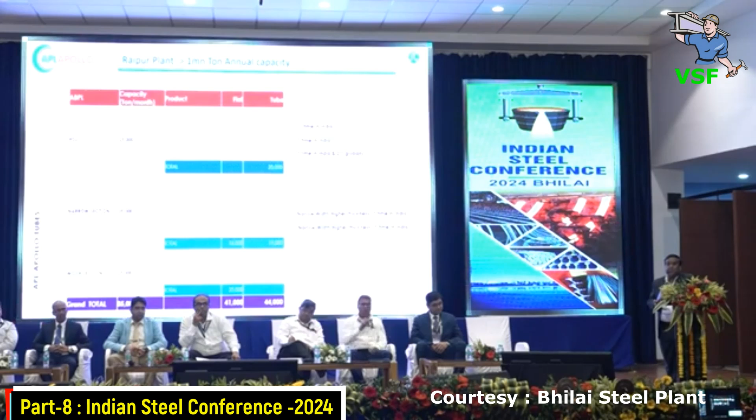So this has already been covered by our CEO yesterday. This is the gist of our APL Raipur plants. We have 4 plants, 600 acres of land, where we are producing both tubular as well as flat products. Out of those 4, we have 2 flat products complexes and 2 tubular, where we are producing from 8mm into 8mm to 500 into 500. Very soon we are going to produce 1000 into 1000 into 40mm.

That will be the first in India and second in the world. Approximately 85,000 tons per month is the capacity, overall 1 million tons annually. Very soon we are going to touch 1.5 million tons in a single unit.

In the tubular section we are producing precision commercial tubes from hot roll, cold roll, CRCA, GI, etc., and then black HR hollow sections and blanks. Almost 90% of our own plant structure is made by us.

So regarding the corrosion problem - every year almost 5% of the world's GDP is lost on account of corrosion, and in India approximately 4% of Indian GDP is lost on account of corrosion. That comes to around $100 billion, which is nearly 8.21 lakh crores per annum. So imagine what we are losing.

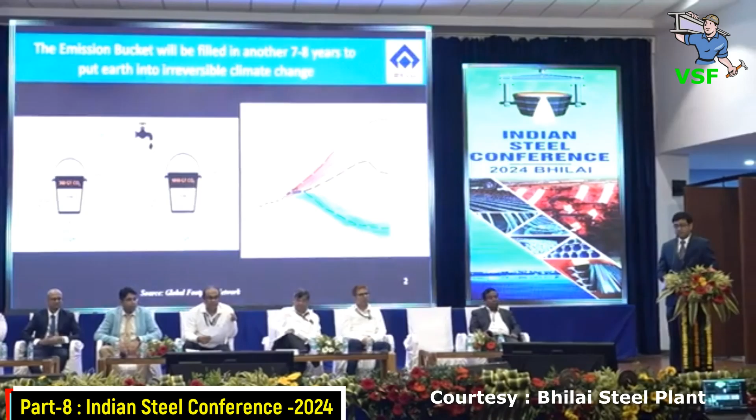It is so that the emission bucket will be filled in another 7 to 8 years, putting Earth into an irreversible climate change. I welcome all of you to my presentation on the paper Decarbonizing Steel, the Way Forward.

It would be a summary of all the previous presentations that my friends from Steel Authority of India Limited have been telling you since morning. So what is decarbonization? Decarbonization basically targets climate stability, targeting a healthy environment for all of us, economic stability, directed towards achieving sustenance.

Steel, as we know, is one of the most important materials of modern life. Making it is highly carbon intensive, and 1 ton of steel actually produces 1.8 tons of carbon dioxide emissions globally.

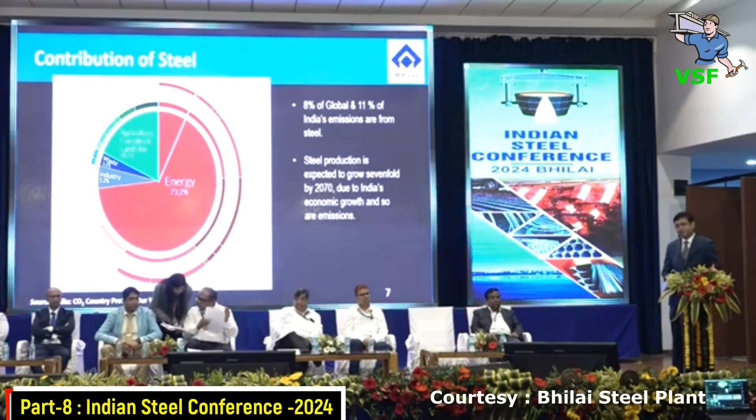So why decarbonize steel? Steel contributes around 8% of global and 11% of India's emissions, and steel production is set to rise 7-fold. With India's economic growth, emissions also tend to increase. Megatrends indicate that 14% of steel companies' potential value is at risk, along with growing investor and public interest towards sustainability and greener products.

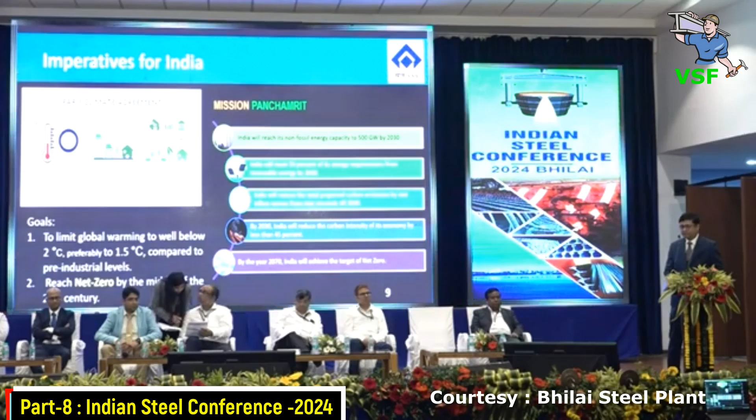Imperatives for India are basically drawn from Mission Panchamrit, Government of India, to reach net zero by the middle of the 21st century. Looking at the two popular routes of steel making in India, the average from BF, the most popular one, is 2.5, and from coal-based DRI and electric arc furnace is around 2.8. The thermodynamic limit of the BF process is around 1.8.

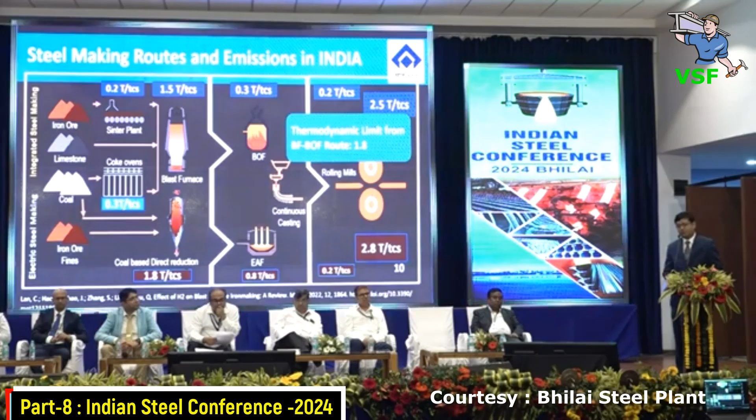But if you look at this DRI-based electric arc furnace with green electricity and green hydrogen, it can be brought down to as low as 0.1 ton of CO2 per ton of crude steel.

For the way forward, there are basically two ways to do it: controlling input like raw materials and electricity, and controlling output, that is by improving efficiencies, circularity, and carbon capture and utilization.

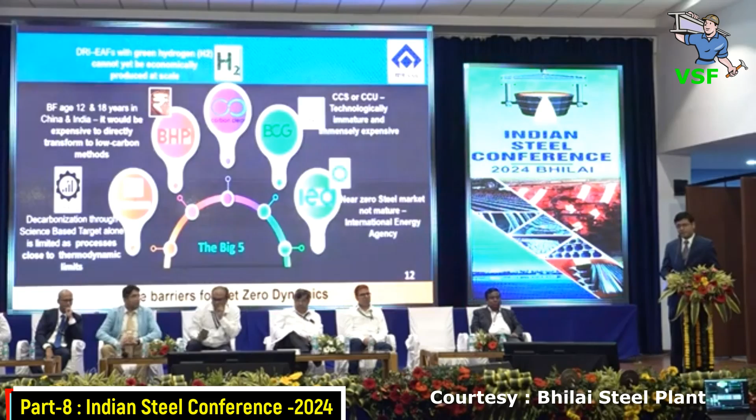There are many significant barriers in the net zero dynamics. First and foremost, decarbonization solely through science-based targets is not really possible. Many of the furnaces in India and China are quite new. DRI electric arc furnace with green hydrogen is yet to be economically produced.

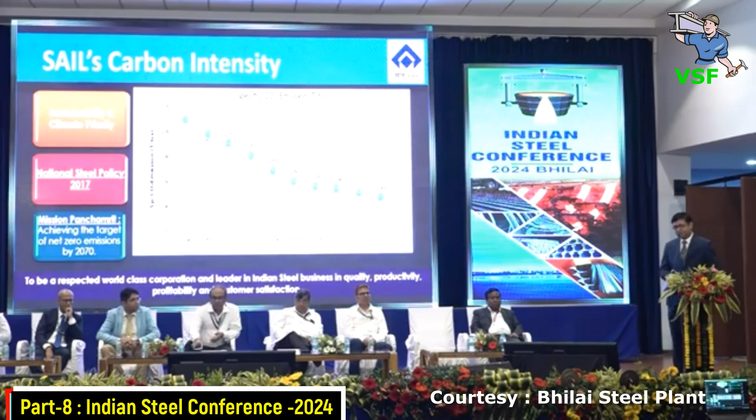If you look at the carbon intensity, we have been significantly coming down over the years, and we are hovering at around 2.5 right now. But how to decarbonize? Looking at what we did for Steel Authority of India Limited, the most significant opportunity in front of us is that markets for carbon neutral products are slowly coming up, along with significant government support in achieving our targets.

Decarbonizing is basically through three phases. First, we target to control the carbon-based reduction process through efficiency increase. Next would be to change over to carbon-free technologies, many say hydrogen, or there might be some other alternative we don't know in the future. Then there would be a tumultuous phase called the transition phase.

Mission for way forward in Steel Authority of India Limited can be divided into three phases. In phase 1, we target minimizing CO2 emissions by increasing process efficiency, MODEX, with best available technologies. In phase 2, we target optimizing carbon neutral technologies with the existing ones. In the last phase, we target attaining net zero with whatever contemporary technologies are available at that time, CCUS, maybe RE, maybe alternative fuel reductant, hydrogen, again as a question mark.

We are not just focusing on one aspect of our business, but every aspect, starting from leadership, strategy, partnerships, processes, people, change intervention, results in metrics, resources, all with the help of many vendors, collaborators, academia, and everyone. We have a 1 lakh crore capex plan by 2030, targeting not just larger blast furnaces, but also more efficient blast furnaces.

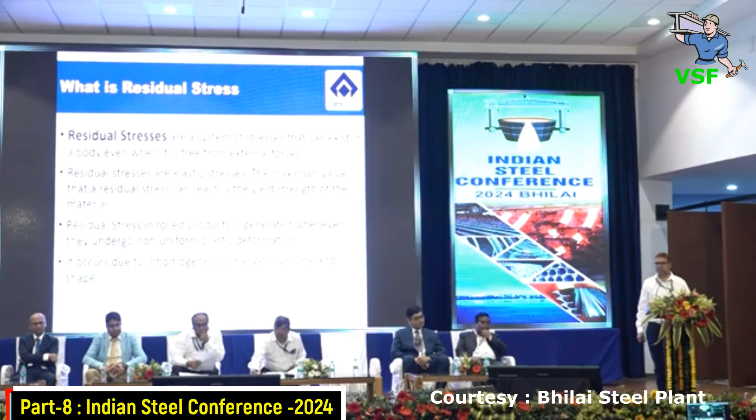And what is residual stress? Residual stresses are a system of stress that can exist in a body when it is free from external forces. Residual stresses are elastic stresses - the maximum value that can reach is the yield strength of the material. Residual stress in rolled product is generated whenever they undergo non-uniform plastic deformation, and it occurs due to inhomogeneous change in volume and shape.

Residual stress in rail - we know that life of rail depends on the rate of wear under the action of wheels and the rate of propagation of fatigue cracks. Tensile residual stresses are harmful because they help in crack development, and compressive residual stresses have a positive effect on fatigue, fracture stress and stress corrosion. As per Indian Railway specification, this limit is 250 megapascal.

Fracture of rails: rail deforms plastically when total applied stress is more than yield stress. Total applied stress is equal to bending stress due to wheel load, plus thermal stress due to temperature differential, and residual stress in the rail. Bending and thermal stresses are generated during service of the rail, while residual stress is generated during rail manufacturing.

Rail also fractures by other forces that can produce a defect of critical size. The critical size of defect is Q into K1C squared, divided by 2 pi into sigma squared, where sigma is the total applied stress, K1C is the fracture toughness of the material, and Q is the safety factor. As applied stress increases, the critical defect size decreases.

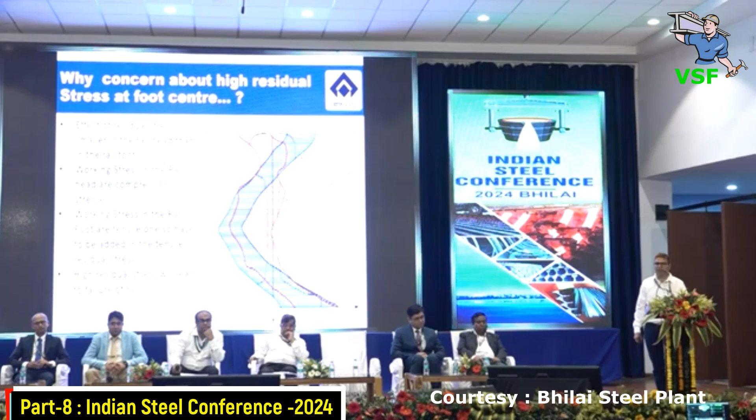Why is there concern about high residual stress at the foot center? Here you can see in the photographs two types of residual stress profiles, one for a used rail and the other for a new rail. The effect of residual stress is smaller in the rail head than in the rail foot. Working stresses in the rail head are compressive, while working stresses in the rail foot are tensile, so they add to the tensile residual stress, which leads to failure of the rail.

Measurement of residual stress in rail: for measurement of residual stress, we use a strain gauge. It is used to measure strain, and the resistance of the strain gauge changes when force is applied, giving a different electrical output. A strain indicator and recorder measures the change in resistance due to strain induced in the strain gauge, and converts it to a micro strain value using the strain indicator.

As per Indian Railway specification, we use the transverse template cutting method, which is a destructive method. In this method, a 1 meter sample is cut from the rail, leaving 3 meters of the rail section, and the surface of the sample is carefully rubbed with a fine grinding stone and emery paper. The cleaned and marked test location is prepared, and the strain gauge is installed, fixed using M-bond 200 adhesive. After the adhesive cures, connecting wires are soldered to the strain gauge terminal.

After that, a 20 mm slice is cut from the sample to ensure the gauge is positioned at the center. After the slice is cut, the relaxed strain is again measured using the strain indicator, which provides the strain in micro strain units. By using the formula stress equals Young's modulus into strain, we can calculate the residual stress in rail. Young's modulus of rail steel is fixed at 2.01 into 10 to the power 5 megapascal.

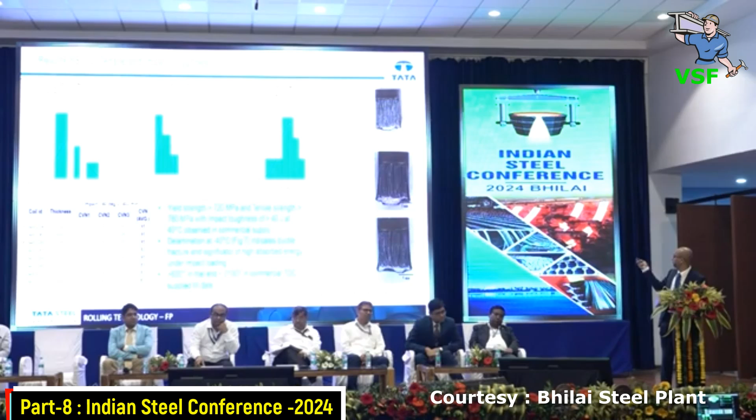This is the fracture surface, which shows quite a lot of ductile fracture. The way we achieved it was by engineering the crystallographic texture.

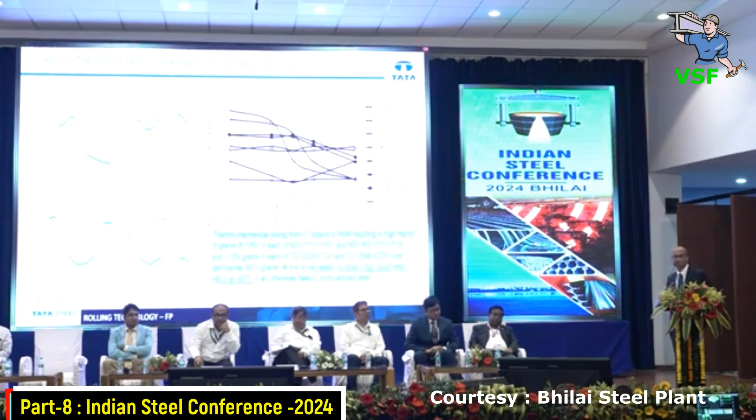So we made a very strong ND fiber, which has got a 554-225 component, and a very strong RD fiber, which is 112-113 component, really reducing down the rotated cube, which is detrimental for cleavage fracture. So this is the way we have nailed this particular product.

Then we compared with the competition. Other manufacturers from Europe and Indian steel mills go for a different microalloy strategy, which is certainly more expensive. We have gone for a very lean alloy design so that we can save in terms of ferroalloy optimization as well. So this is the crux.

I'm getting to the summary. This particular steel, which was being imported from Europe, is now being made in India, and we have completely achieved import substitution.

Besides this story, I would like to share one pride moment with us. Tata Steel, along with Welspun in India, has made API X65H steel suitable for 100% gaseous hydrogen transportation for ERW line pipe, first time in India. This is what we have announced, and we are looking forward to going for CCUS as well as LSAW for hydrogen transportation.

Thank you very much, I think I'm within 5 minutes.

Thank you very much. It's a nice product that is helping our country's revenue by bringing down imports. Very good. Now I will request viewers for any queries.

Are you also making X65 sour? Yes sir, we are making X65 sour for ERW up to 30 millimeter.

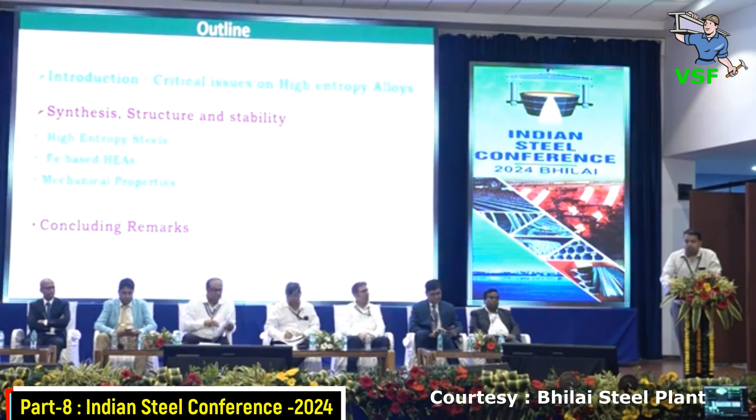First we'll be discussing the critical issues related to high entropy alloys. Then we'll be talking about high entropy steel, Fe-based high entropy alloys, and mechanical properties, followed by some concluding remarks. So if we look at the sequence of material development, since time immemorial...

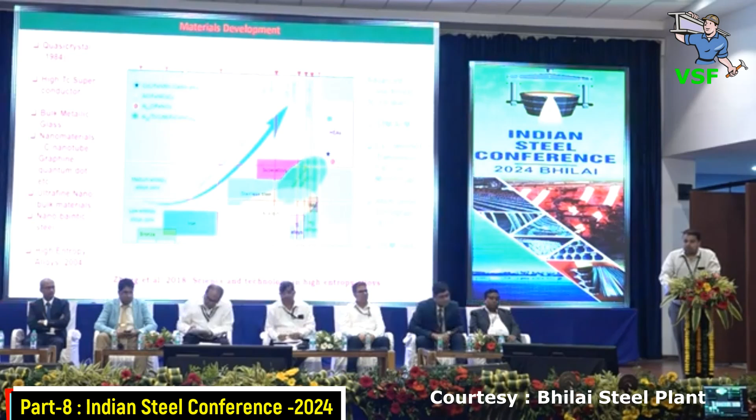The various human civilizations were known by the materials of importance. So we can see Bronze Age, Iron Age, and still iron and steel has its own relevance till now. People have thought of replacing it, but iron and steel is still irreplaceable.

Many advanced materials were also discovered, like quasi-crystals, bulk metallic glasses, nano bainitic steels, and in 2004 the concept of high entropy alloys came about. Mostly advanced characterization techniques like STEM, Cs-corrected transmission electron microscopy, and recently APT are being used for its characterization and understanding structure-microstructure correlation.

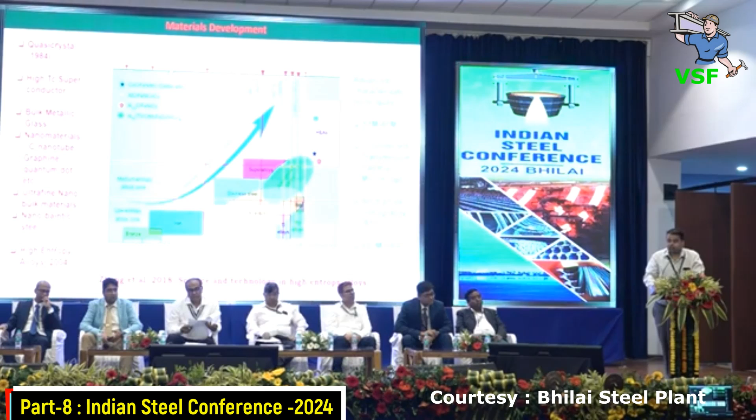Coming to the concept, in a conventional alloy we have one major element and 2 to 3 minor alloying elements, and we have a single phase structure. However, for a long time it was considered that if we have multiple elements, then we would get multiple intermetallic phases.

However, in 2004, Brian Cantor from UK stated that if we take elements in equiatomic proportion, then it will lead to the formation of a single phase solid solution, due to mechanisms like severe lattice distortion and sluggish diffusion. Due to all these properties, high entropy alloys and high entropy steels have high thermal stability, which makes them a perfect material for high temperature applications.

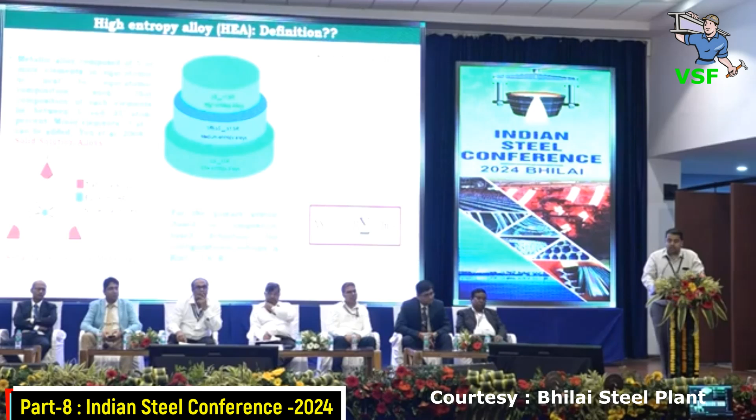Here we define, basically we can have an equiatomic ratio or non-equiatomic ratio. Non-equiatomic means one element will be somewhat in excess and other will be adjusted, and the atomic fraction will be 5 to 35. Basically this kind of single phase alloys are stabilized due to the entropy effect, which is greater than 1.5 R.

So why are we talking on this forum about high entropy alloys or high entropy steels? As discussed yesterday by many speakers, we need to recycle scraps and end of life products. For recycling end of life products, it is very difficult to segregate all this kind of product and remelt it. Sometimes we have products which contain copper, and copper and iron have a positive enthalpy of mixing, which often leads to embrittlement in this kind of steel.

So by using the concept of high entropy alloying, we can make high entropy steels which will have mostly a solid solution phase, and will have some minor phase which will strengthen this high entropy steel. By this method we will be able to use end of life products and recycle them, as a small effort towards decarbonization.

The first article on high entropy alloys to high entropy steels came in 2014 from Professor Derek Raabe's group, which is now the Max Planck Institute for Sustainable Materials in Germany, and they are actively working on these things.